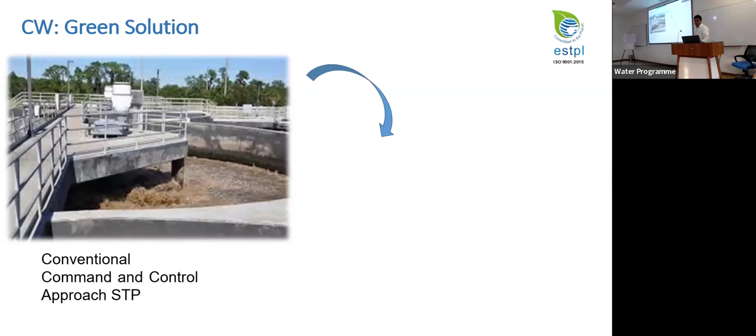This is not working. Yeah. So this is the command and control based technologies, conventional technology. As soon as the conventional technology name comes, the first picture comes in the mind is the big STPs with huge size of blowers, motors, pumps, huge energy consumption, so much of skilled manpower with the coat and blazers operating the STPs, right? What we want is to shift this to the eco-based system approach, where everything can be done by the nature-based approach, right?

So this is the technology known as Phytorid technology. The class is phytoremediation, which is actually the paradigm shift from command and control based approach to the ecosystem based approach, right? The technology is based on ecological wastewater treatment designed to mimic the cleansing function of the wetland with a smaller footprint. Let me take you to some early stages.

You might have seen in the rural areas some specific type of makeshift kind of toilets. झाड़ पत्ती से बना के they just cover it, and there is a toilet which they use for daily purpose, and the waste which comes out from those makeshift toilets runs through the stream, where you find a typical kind of vegetation, the cattail, the reeds, some big leaf plants, right? These are some specific plants which grow along that channel of the drain. Everybody would have seen. Those are actually the wetland system.

These plants are actually made, or by God, you can say, for the cleansing function of the wastewater only. They have specific functions by which they treat the wastewater. I'll tell you in brief how they treat, but this is the genesis of the constructed wetland system. We have studied those phenomena. We have done engineering on that, made an engineered structure with proper retention time structure tank, and did several analysis to treat the wastewater.

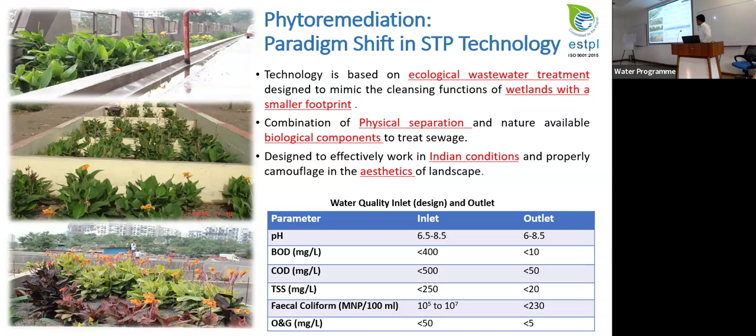Yeah, moving ahead with the components of this kind of system. This is how the system looks. It has, again, the preliminary treatment system where we install screen and grit chamber to remove all the floating plastic, rubbish material. Then comes the primary system where we have a settler tank, which is again an RCC tank with a baffle kind of arrangement in the tank.

These are the baffles. This is the closed tank, because what we want here is an anaerobic reaction. The system follows anaerobic as well as aerobic treatment. What is anaerobic? The treatment which is done in absence of oxygen or air. Whereas aerobic, where we need oxygen for the treatment process.

How, I'll tell you. So this is the first part after preliminary treatment, which is the settler tank, where partial treatment happens, almost like 30 to 40% of the pollutant load reduces here anaerobically, followed by the secondary treatment, which is the Phytorid bed. Now, this is the heart of your system. It is again an RCC tank with a baffle kind of system filled with different gradients of gravels.

The bottom layer with a light color is the big size of your gravels or pebbles, almost like 180 to 200 mm size. Next, the intermediate level is around 100 to 120 mm size gravels. And the top level is filled with 30 to 40 mm size small gravels. Why? To maintain the rate of diffusion.

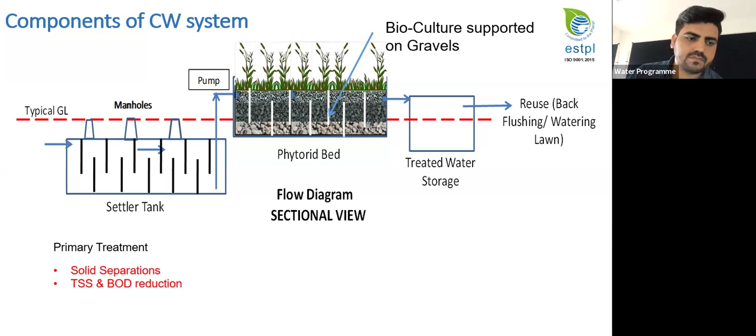So in the picture that you have shown, the settling tank is under the ground, right? It's constructed underground, and so the water is pumped into the Phytorid bed. So can that be on the top, like on the same surface, so that it could run in gravity flow itself to avoid pumping?

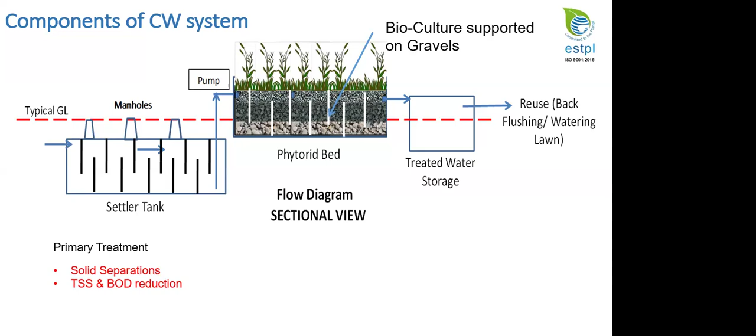Yes, I was about to come to this point in the next slide, but I'll tell you in this slide as well. Yes, whatever you have pointed out is correct. This is just for representation purposes. Based on the hydraulics, we can modify or alter the design. Let's say if you have sewage coming from the ground level, which can easily be allowed to go to the settler tank, this Phytorid bed can be brought down.

What we have to maintain is just the inlet and outlet level. The outlet level of each tank should be at least 100 mm below the inlet point, so that gravity flow can be maintained. This is deliberately shown in case your sewage at the dedicated spot is almost 2 meters below. In that case, you need minimum pumping. Otherwise, you don't require even a single pump. If hydraulics allows gravity flow, we don't require any pump.

So yes, correct. This bed can again be brought down, and the whole flow can be allowed to flow through gravity. I hope I have answered the question. Yes, yes. Thank you.

So moving ahead, this is the primary treatment where all the solid separation, partial TSS and BOD reduction is done. This is secondary treatment where bio-oxidation of organics is done by bioculture, which is just a one-time addition. We have to add it just one time during commissioning. It forms a colony within 24 hours, and it is never required to be added again.

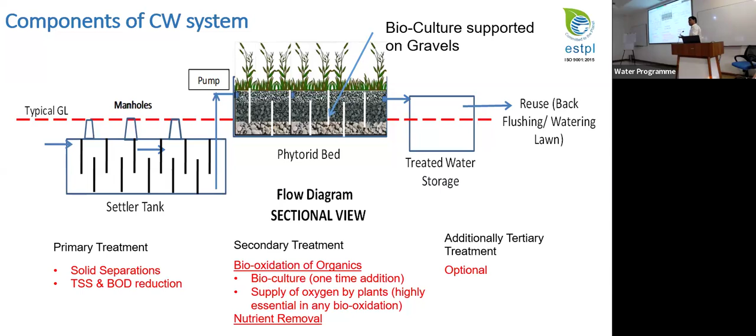Next is scalable. It can be considered from 10 KLD to 50 MLD, also in batches. As to aesthetics, I've already introduced that. Low life cycle cost: when we compare with the conventional STP, I'll also tell you about the cost, although the cost session will be on day 3, which will be done by the experts.

But for this kind of STP, capex is on a bit higher side if you compare with the SBR and MBBR. Why? I'll tell you. These are passive systems. Everything is done by natural treatment, where the kinetics or the rate of treatment is on the lower side. To meet the permissible limits, it requires time for treatment. Since time is involved, space is involved. That's why the capex is high, at some point larger than the MBBR and SBR.

But when you compare the life cycle cost, let's say 5 years to 10 years, with the maintenance also, you are actually much more benefited than with the SBR and MBBR. You can actually get ROI in the next 3 to 4 years. So that is the beauty.

Application-wise, this can be installed in residential colonies, hostels, offices, all rural kinds of areas, and urban regions. You can also install it near a nala where interception, diversion and treatment can be done, which is currently in demand by ULBs. They want interception, diversion and treatment to be done there and then itself. There also these kinds of plants are installed. For lake rejuvenation and river conservation also these plants can be installed.

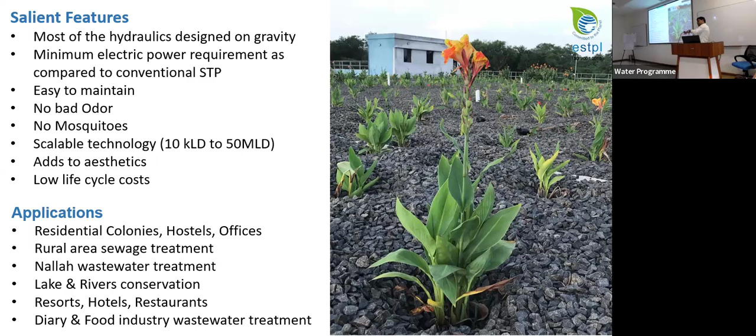Resorts, hotels, restaurants, all kinds of industries or sectors, wherever there is wastewater, these kinds of plants can be installed and the water can be treated. The beauty is we can install right from 10 KLD till 50 MLD easily. So in a decentralized way or a centralized way, both ways it can be installed and run.

Moving towards technology recognition. Whenever you have a technology, you should also check whether it has been analyzed, checked or approved. This technology has recognition by the Raghunath Mashelkar Committee for innovative technology in the field of water and sanitation. Next, it is also endorsed by the Ministry of Drinking Water and Sanitation for technology based on no power requirement for maximum recycle and reuse of wastewater. It has also been recognized by MoDWS for innovative technologies.

It has already been adopted by the Maharashtra government, where Maharashtra Jeevan Pradhikaran has installed a number of plants in Maharashtra. Now it has also been adopted by UP, Bihar, Orissa, Jharkhand, MP, Chhattisgarh, AP, and Telangana. In MP, currently there are almost 100+ live tenders for this kind of STP. They want constructed wetlands to be installed in the rural areas. So these are good examples.

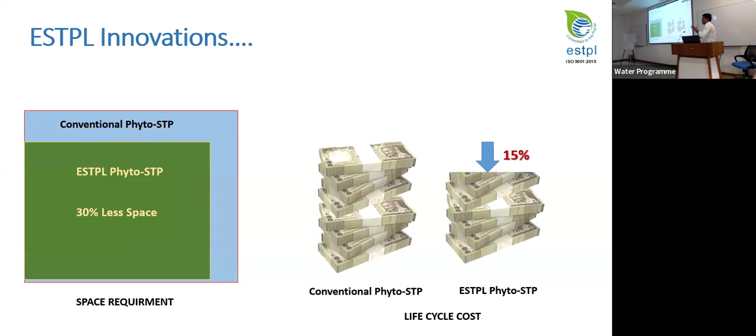Since the space is reduced, the cost is also reduced. With this innovation, the cost has been reduced by 15%. So this is much more sustainable, much more feasible, more economically feasible, and all the other benefits have already been told to you.

We are now in the 11th year promoting these technologies with a strong technical background, 10 years of effort put into this. We have a presence in almost 10 states, and we are also the technology provider of one of the biggest plants in India. As far as my knowledge goes, this could be the biggest plant in the world: a 20 MLD STP on constructed wetland. I have never seen a 20 MLD or bigger constructed wetland based STP. If you have, you can always tell me.

We are the consultant for that plant, and I'm happy to share that it was commissioned just 10 days ago in Alwar town. In Alwar, there is an STP based on constructed wetland technology with a capacity of 20 MLD. I'll show you the images in the next part.

Moving to the case studies. Till now we have talked about the technology, its components, the advantages, the recognitions, where it can be used, and who the potential clients or stakeholders are. Now, these are the case studies we have experienced, where these plants are actually installed community-wise.

This case study is for schools. We can install for government schools or private schools also. You can promote it in your region. This is one plant installed in Nagpur for Munle Public School, running for the last 2 years, 100 KLD capacity. This is how the plant looks.

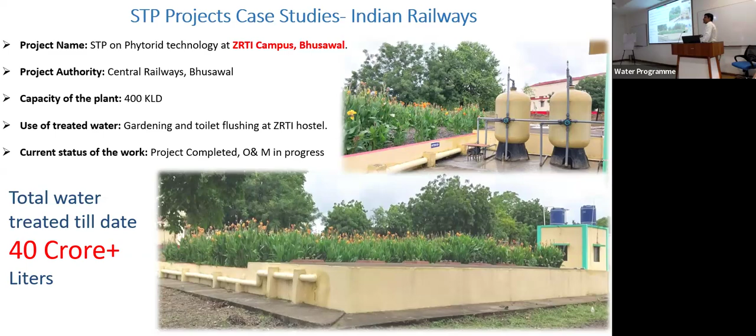This plant was installed almost 4 years ago, in 2020, and it is running fantastically. Till date, and this again is an old figure, we have treated almost 40 crore plus liters of water. This water is being reused for horticultural purposes as well as toilet flushing in their hostels. They have a ZRTI, a Zonal Railway Training Institute, where officers are trained. They are reusing the treated water for toilet flushing at the ZRTI Institute.

One more plant we have installed for railways is at Nashik station. You can go anytime and visit this plant. At Nashik station they have a platform where they have installed it, and the treated water is used for platform washing. They have reduced the consumption of potable water and are now using recycled water from the STP for platform washing. One more good case study, recently commissioned.

This was not the platform; the platform is just beside this. This was the open space available, a rubbish land. We converted that land into the STP. Whatever waste comes from the toilets and the nearby railway premises goes to the drain; we tapped the drain, constructed a weir, and the total water is diverted to the STP. The water is treated, stored in the overhead tank, and reused for platform washing as well as filling the coach tanks used for toilet flushing in the railways at Nashik station.

This elevated structure is the settler tank, and this is the bed. As I told you about the hydraulics, water comes to this bed by pumping from the nala, and from this point till the last point, everything is by gravity. The complete treatment is energy free. No energy is required for treatment in this whole plant. This is how the plant looks. Nashik station actually got a 5-star rating from their environment department because of the installation and commissioning of this plant.

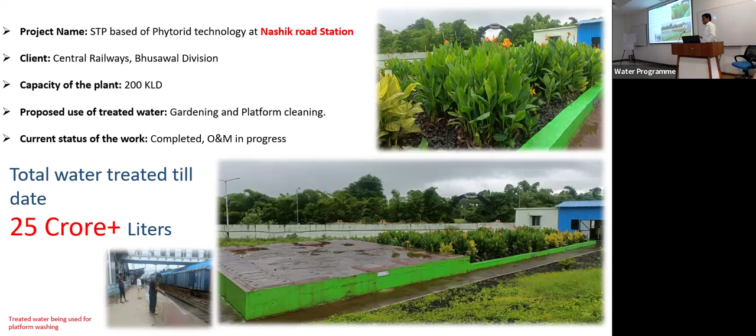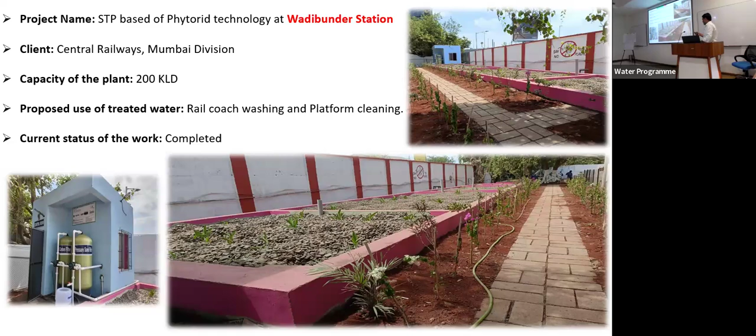After so many success stories, they have given us one more plant, recently commissioned at Wadibunder station, Mumbai. Here, the wastewater collected from washing locomotives at the service station, along with toilet waste, will be treated with this STP and reused for locomotive washing. So this is one more plant with the railways. This plant is installed in Nagpur for a hospital, where we made a unique design combining ETP as well as STP.

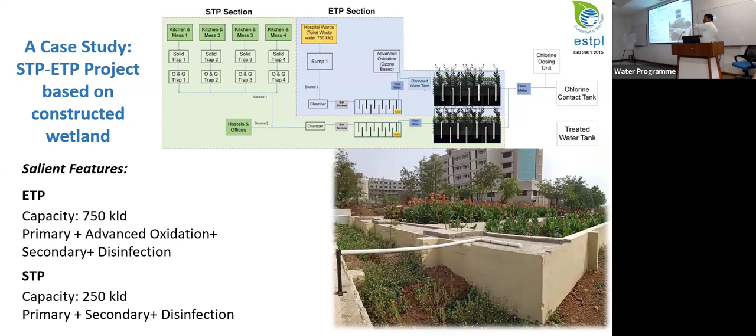The ETP has been initially designed for advanced oxidation treatment, where we give ozonation to treat complex molecules of pathogens and antibiotics, where they get broken, and further treatment is done using the Phytorid bed plant. This is 1 MLD capacity, and they are using this water again for toilet flushing. They also have a lake nearby with an amphitheater. They are discharging the water into the lake where they do boating, and it maintains the aesthetic of the hospital.

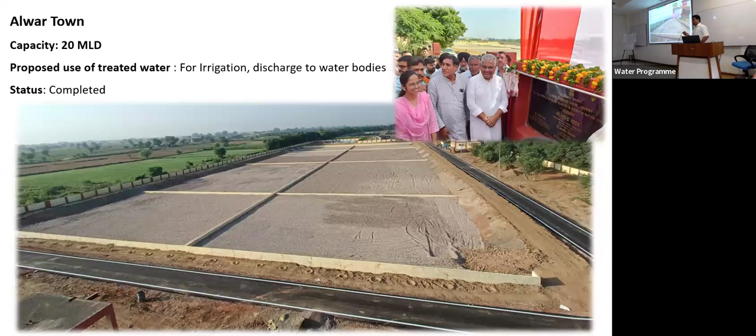So moving ahead, this is all about the Phytorid STP, its design, its cost, and the case studies. I hope you have got a brief idea about the Phytorid technology now. Next, we will move on to in situ drain treatment technologies. These kinds of technologies, phytoremediation, or constructed wetland, can also be used for in situ drain treatment. What is in situ drain treatment? Can anyone? I know the last session is a bit hard to digest, but still, just 15 minutes more. Yes, please. Correct. Where the treatment can be done in the drain itself.

But what about the funds? What about the time? What about the technologies? This is not a very easy task for ULBs or the bigger urban areas. So with that, they have also suggested alternate technologies. Why don't we do one thing? Instead of putting all the load on the STP or the water body or the river, why can't you reduce the pollution load in the drain which is carrying the sewage?

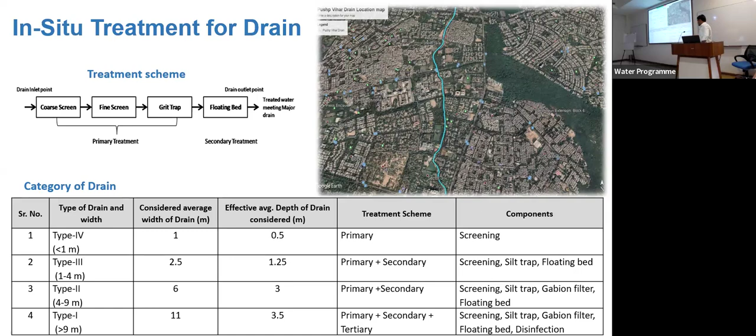Gabion filter, I'll show you. It's stones packed in a mesh, a wall of stone. That is the Gabion wall which we prepare. We need it because it acts as a porous membrane. If we install it in a zigzag pattern along the length, water will form sinusoidal patterns and also flow through the pores of the Gabion wall, in which we add particular biomedia by which filtration can be done. Similarly, in the Phytorid bed we add gravels and bioculture media. Here also, we add bioculture media which comes in contact with the water, reacts, decomposes the organic matter and reduces the pollution load.

So these are the steps. Let's say screening. This kind of screen can be installed in the drain where the rubbish or floating material can be arrested. This is the silt trap. After the screen, we can make a weir kind of arrangement so that the sludge and silt getting washed away with the water can be arrested and removed. So the pollution load again can be reduced.

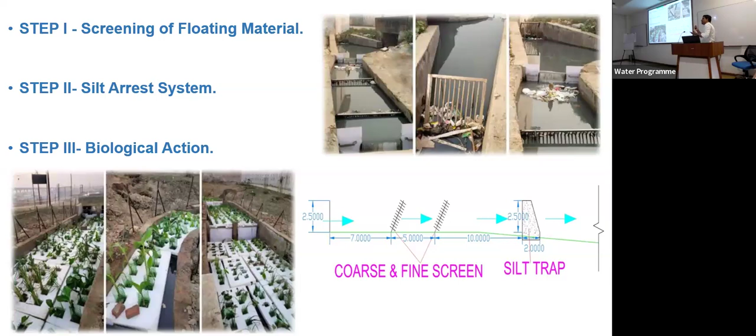Third, this is the biological action, which is the floating raft. Again, these are the same plants we planted on the gravel in the Phytorid bed. Here, using floating polyurethane foam sheets, plastic sheets or coir, any material can be used on which the plants can be planted and allowed to float in the nala, so that the roots come in contact with the water, where oxygen can be diffused into the water and further treatment can be done, similar to what I mentioned in my previous slides.

This is one of the layouts I want to show, which we have prepared for the Pushpa Vihar drain in Delhi. This is almost a 1.8 kilometer drain where the wastewater was going to the major drain, which is Najafgarh drain, and meeting the Yamuna, which was big news a couple of years before. So this is one of the major drains where they want to reduce the pollution load.

We have suggested initial preliminary treatment by giving screens. Then Gabion filters, where water flows in a sinusoidal pattern; here we add bioculture media so that biological treatment can happen. Followed by that, this is the floating phytoremediation area where floating beds were installed and treatment is done by biological action, as we have mentioned.

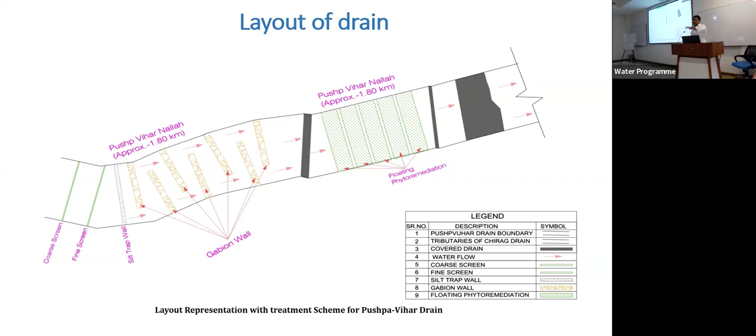The main difference in this technology is the flow: there it is vertical flow, here the flow is horizontal. Here we cannot maintain that. What we want to do is use baffles to increase the residence time. We want water to stay in that region for more time. It doesn't matter if you allow it to flow top to bottom or in a zigzag pattern. What we want is the water should come in maximum contact with the gravel surface and the residence time should be maximum within the limited space, so that maximum treatment happens in the same space. That's the concept.

And this is how the drain now looks. This is the floating bed which we have prepared. Earlier, I don't have the image right now, but earlier this drain was like you could not even keep your nose open. Sorry.

Is this a natural drainage or artificial drainage? Hello? I think somebody... That's natural. Is this natural drainage or artificial drainage? This is a natural drainage. Hello, everyone. Hello. Jyoti ji, can I address this question just after?